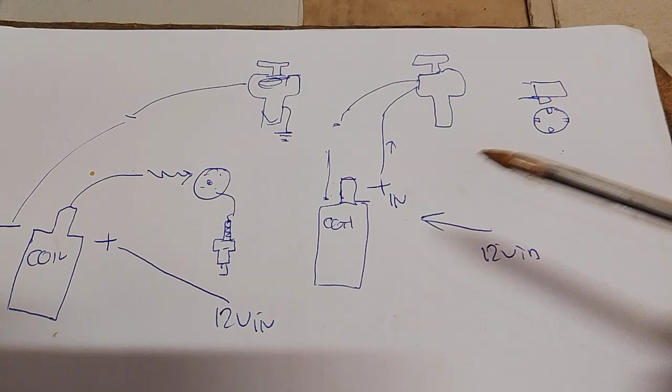You've got 12 volts coming in from the car ignition switch. Then there's a 12 volt supply down to the ignition control unit, a little black box that lives in here. And then there's another wire coming out which connects to the minus side of the coil.

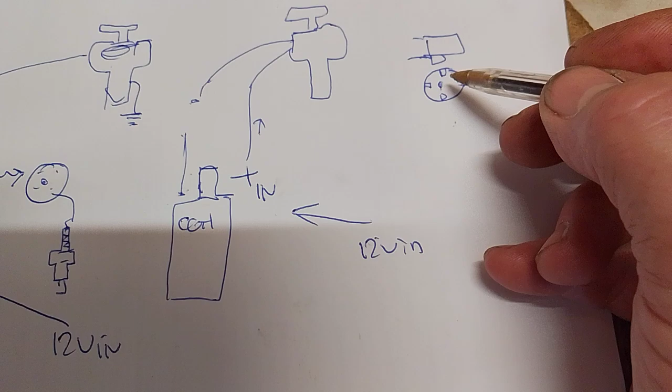Inside this unit it's basically like an electronic set of points. There's a disc mounted on the shaft which rotates, with a little notch in here - 4 of them, obviously 4-cylinder - which corresponds with a little sensor on the electronic pickup. There's power coming in here, and then of course it collapses the field. This in turn collapses the field in the coil, and the coil fires out the distributor cap.

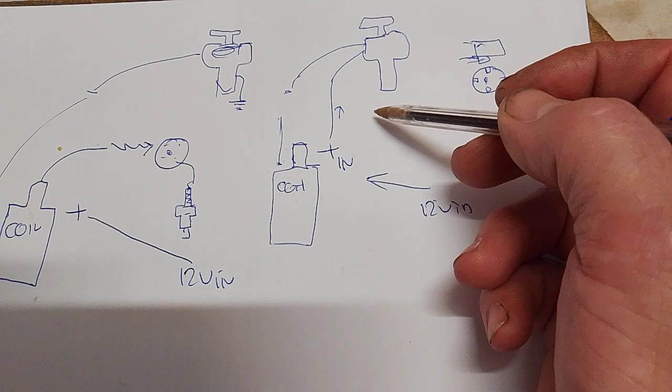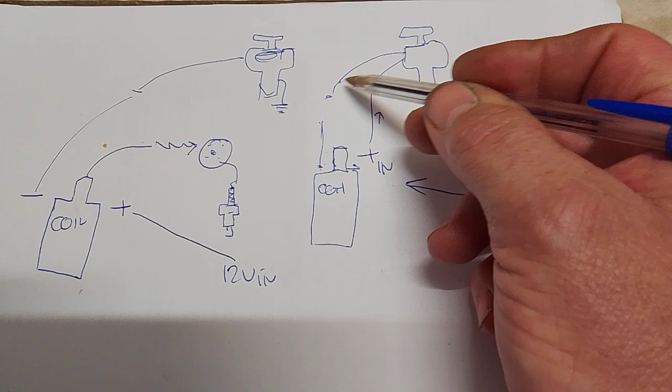Now, when they've installed this, obviously the 12 volt supply is also switched, and you just hook it to the spare terminal on the coil. Now, I'm looking at this thinking some enthusiastic soul at the car show has put the positive onto the negative side of the coil, and they've put the control wire, I suppose you call it, onto the positive side. And of course they've now fed reverse polarity into this little unit, which I presume simply let the smoke out, and that was the end of that.

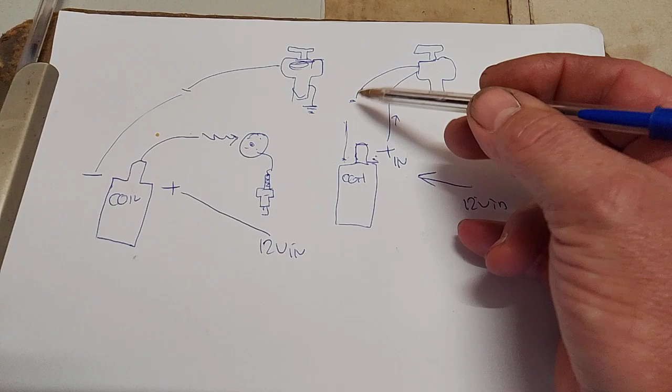Because they did actually get it to start briefly, and it coughed and spluttered and died, and that was the end of it. So, okay, the wires had continuity as far as here, but there was no circuit through this, there was no resistance, so I presume the unit was basically fried.

So I said to him, okay, let's get the points one. I go to remove this, and where it sits on the clamp at the bottom, it was literally in by about half a mil and could have fallen out any moment. So put the points one in, timed it up by eye.

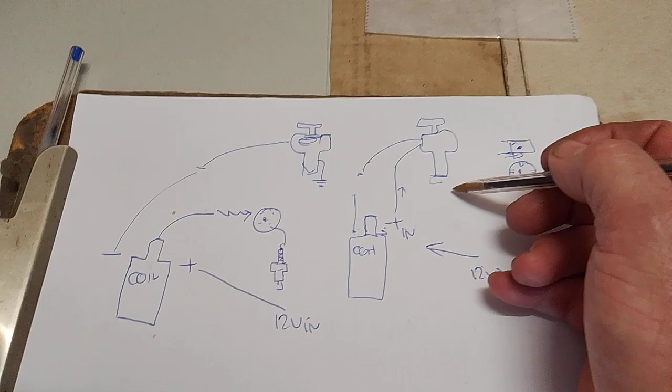And that disc is dead simple. You've got a set of points in here. You've got the wire leading to the negative side of the coil, and you've got the positive side, the ignition switch, obviously the main lead. Simple thing: points closed, it builds up charge, points...

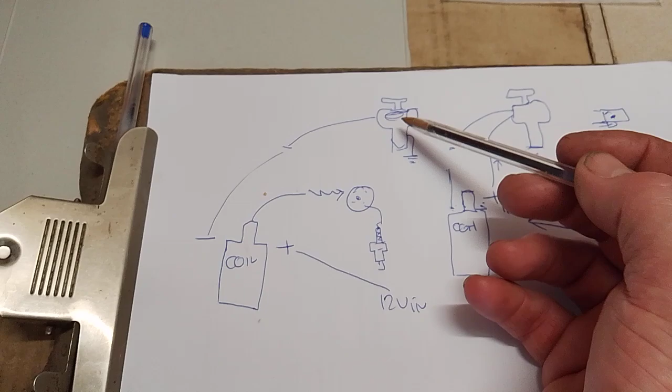Points open, collapses the field in the coil, bang, spark comes out, distributor cap, down the spark plug, bang, engine runs. So this horribly made Chinese aftermarket electronic ignition is now kaput, finished. Put all this back in.

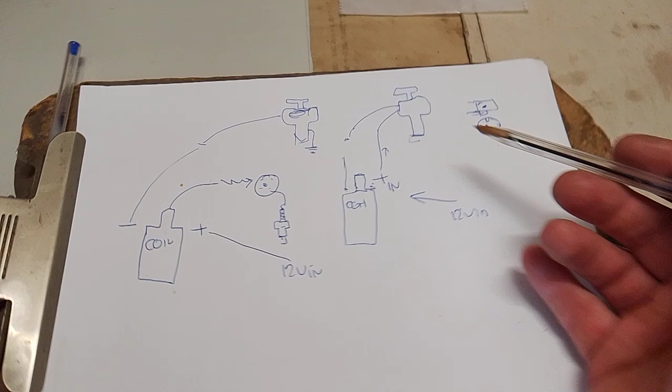Great, it works. I took the spark plugs out, and the guy who put the distributor in had also gapped the plugs to practically no gap. He'd also fitted a new needle in the carburetor and had got it running so rich it was almost running on neat fuel. I didn't have a timing light with me, so I timed it up by ear, and being a trusty old A-series, it ran absolutely lovely, burbled nice, and revved up sweet.

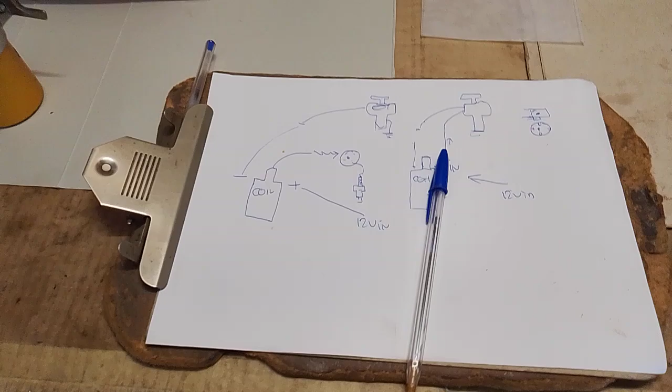Then we moved on to noticing yet again that another one of these quality Chinese Lucas ignition coils had basically leaked the oil out. It's all over the dynamo, all over the distributor cap.

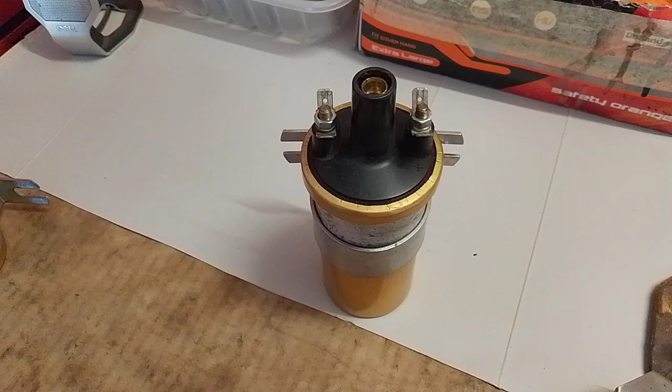The saga of those is, here was the first one he had, about 8-9 months ago. This mounts on top of the dynamo on the Morris Minor at this angle, distributor's back here, and it simply leaked all the oil out around the crimping, and the fan blew it over everything.

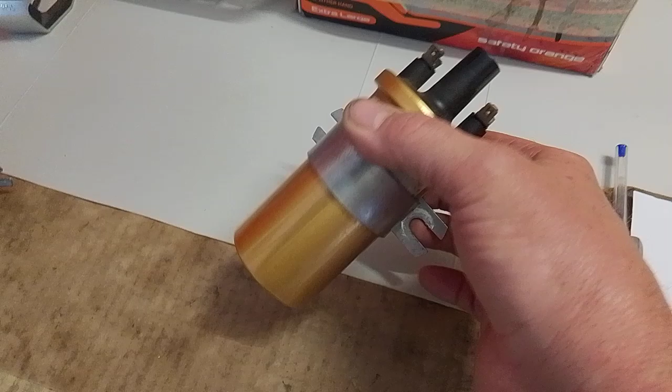So he got onto the supplier. They said, oh no, never had a problem with those, must have been a fault, we'll send you one free of charge. There it is, one with the cross on it.

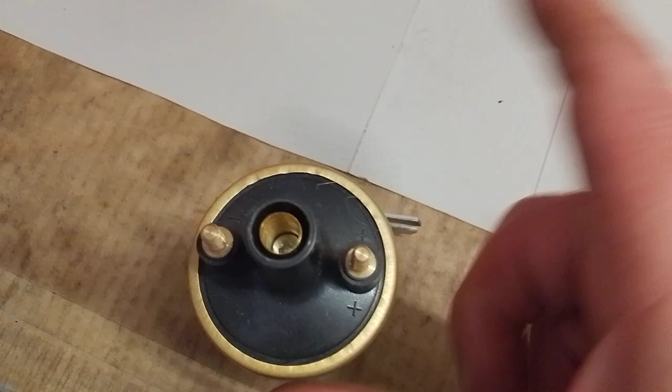Bolted it on. This survived about a month before it leaked all the oil around the top. And you can see by how bad the crimping is, the oil's just everywhere. So he rang them up again, and they said, oh, it must be a bad batch.

We'll send you another one. That's been on there about a month.

However, this time I made a bracket and bolted it to the side of the dynamo. The dynamo sits here in the upright position. When I looked at it yesterday, it's all soaked with oil down here. It's coming out here, and it's blown all over everything.

So we took the other one off, which he's still got, and threw it away. Then I got out his original 1968 Lucas coil, made in England, Birmingham, and put it on the engine in the new bracket position. Lovely spark, engine runs perfectly, all back to original.

So the old 1968 distributor's back in and working fine. Clamps on properly, new set of spark plugs gapped properly. Twiddle the mixture, and it runs like an A-series should, bobbles along happily, runs as sweet as can be. You can always tell with an A-series if it's happy because it'll sound sweet.

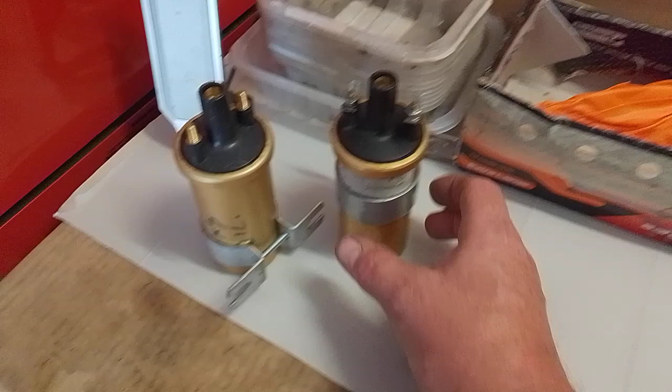So he said some foul language about the man at the car show, and then said, right, all that lot is junk, he's never going near it again. Lesson learned. We will keep the original.

Now I've kept these two coils because they still work fine, and I'll use them on a stationary engine. They don't run long enough to be a problem, but this is what you're dealing with. Cheap junk.

The only other thing he's going to do is pop a new set of HT leads on, they look a bit ancient, and that's about it. So otherwise it's all back to running, basically no new parts required, simply stick back on all the quality old parts.

So he's a lovely old gentleman. He's got a lovely little garage he keeps the car in, full of memorabilia and signs and lots of interesting stuff. We spent the afternoon doing a sort of men in the shed, a few cups of tea, a few bickies, tinkering with the Morris. It was actually a very enjoyable afternoon. He's an interesting character with a really wide knowledge of the area, one of them lovable characters. So I do enjoy having a chat to dear old Richard.

So that's what we put. We put it all back to original, how it worked when it left the factory. Lovely Chinesey stuff here, it's absolute junk. It may look pretty, it may look shiny, it may look good, you might win the show and shine, but you've got to push it home.

So lesson learned. So I'm just on welding up the Honda at the moment. I've done a couple more patches. It's going to be a warm one today, and I don't want to be doing any more welding underneath.

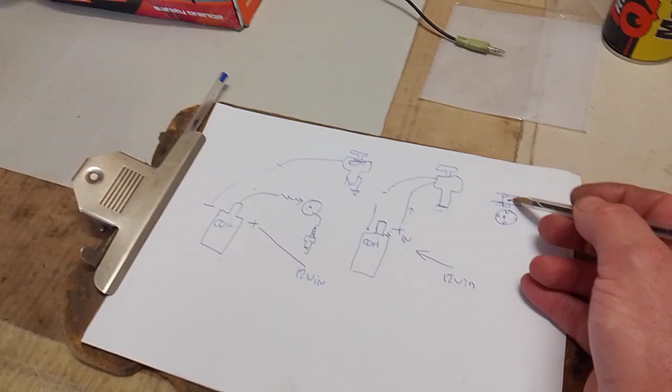As I said previously, I presume there's some sort of coil or winding in here, and I did run an ohm meter across it, and it's open circuit, so I guess the little Chinese box went kaput, and that was the end of that.

So, hope you enjoyed this little update. It's just what I found, and I've had yet another whinge about parts from you know where. And that's all, I'll leave it now.